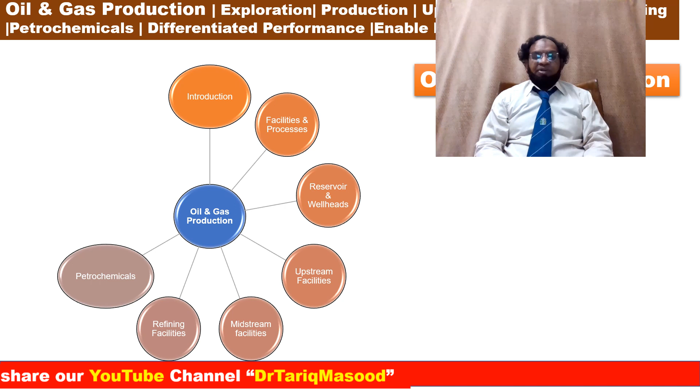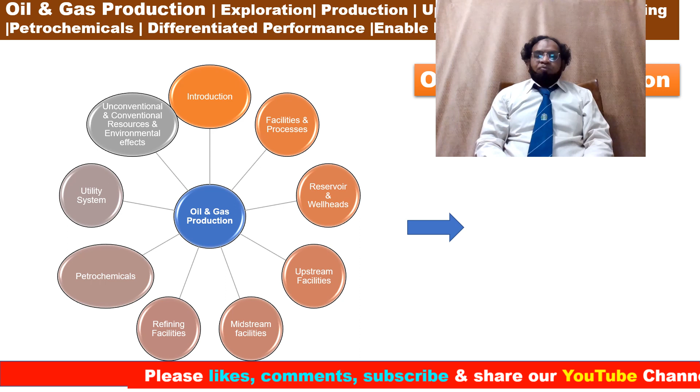Midstream facilities, refining facilities, petrochemical facilities, utility systems, unconventional and conventional resources and environmental effects. What are the ultimate goals? Shaping the clean and sustainable global energy. We have a plan to deliver more than 300 lectures in the next couple of years.

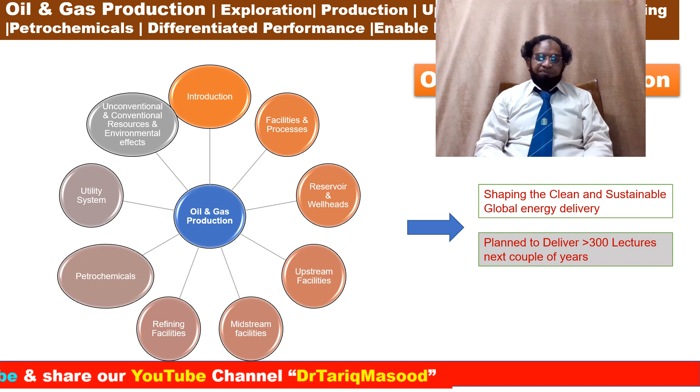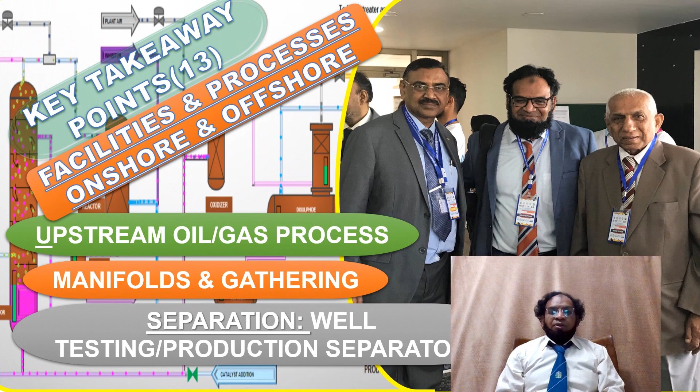Okay, oil and gas production, upstream oil and gas process, lecture number 13. From my next page, I'm going to give you key takeaway points and then I will run a complete trail on my today's lecture. Okay, key takeaway points, lecture number 13: facilities, process, onshore, offshore facilities, upstream oil and gas process, manifolds and gathering, separations, well testing and production separators.

Okay, upstream oil and gas process. The oil and gas process is the process equipment that takes the product from the wellhead manifolds and delivers stabilized marketable product in the form of crude oil, condensate or gas. Components of the process also exist to test products and clean waste products such as produced water.

If you can see in the pictures, I have demonstrated two versions. One is offshore well producers and one is onshore. Okay, this is a medium-sized platform with one production train and it's producing approximately 40 to 45,000 barrels of oil actual production after the separation of the water and gas. The associated gas and water are used for onboard power generation and gas is re-injected back into the reservoir as we have discussed in my earlier slide.

There is only one separation and gas compression train. The water is treated and released. It could also have been re-injected back into the reservoir. This process is quite representative of hundreds of similar size installations and only one more complete gas treatment train for gas export is missing from the system.

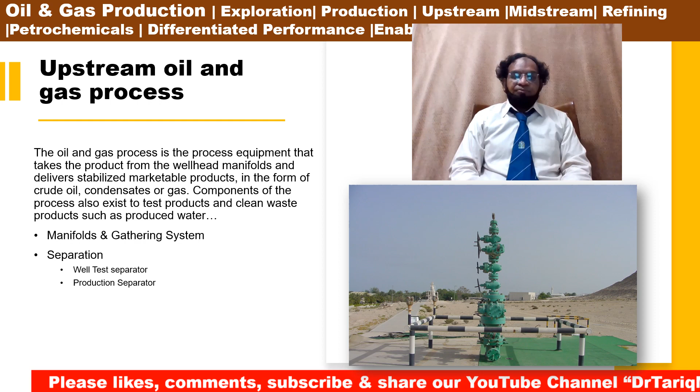Okay, now we will discuss well test separators and production separators. This is the production wells, manifolds. First stage 170, 40, 10 psi, 0 psi, and gas gathering compressor station. This is my dehydration unit, and this is midstream to recover C3, C4 facilities.

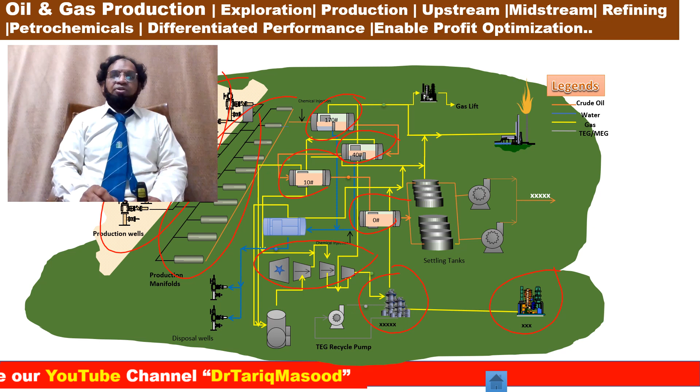Crude oil flows are gathered from different manifolds. Then it's routed to the first stage three-phase production separators. Isolation valve arrangements are provided in the shutdown valve manifold area to ensure a uniform distribution from the different manifolds to the first stage separators. Okay, after implementing a gas lift system, the wellhead pressure dropped from 700 psi to 170 psi.

Demulsifier chemical is injected into each crude oil inlet into the first separators for proper oil and water separation. It helps to separate the water. After separation, gas is compressed and then directed to the dehydration unit. After stabilization, the degassed oil passes under level control into the oil transfer lines to storage facilities at site before being exported into the export area.

Produced water passes through the hydrocyclone where entrained oil is removed. The de-oiled water passes under level control to the degassers, where further traces of oil and gas are removed. The clean water leaves the degasser under level control and passes outside the station perimeter fence to the disposal well.

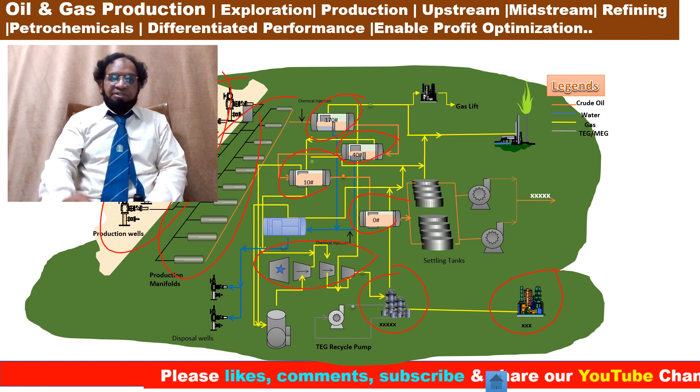This one may include several check valves. The choke, master and wing valves are relatively slow. Therefore, in case of production shutdown, the pressure on the first section before the valves close will rise to the maximum wellhead pressure before these valves can close. The pipeline and risers are designed with this in mind.

Short pipeline distances are not a problem, but longer distances may cause a multi-phase well flow to separate and form several plugs of liquid with gas in between. Traveling in a pipeline, severe slugging may upset the separation process and cause overpressure safety shutdown. Slugging may also occur in the well, as described earlier. Slugging can be controlled manually by adjusting the choke or by automatic slug control valves.

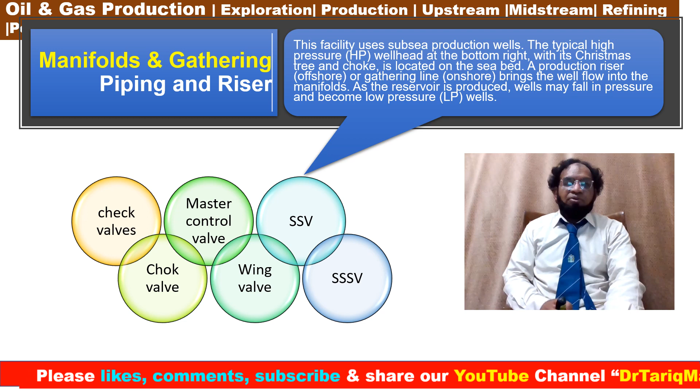The chokes are set to reduce the wellhead flow and pressure to the desired HP and LP pressures respectively. The desired setting for each well, and which wells produce at HP or LP, are defined by reservoir specialists to ensure optimum production and recovery rate.

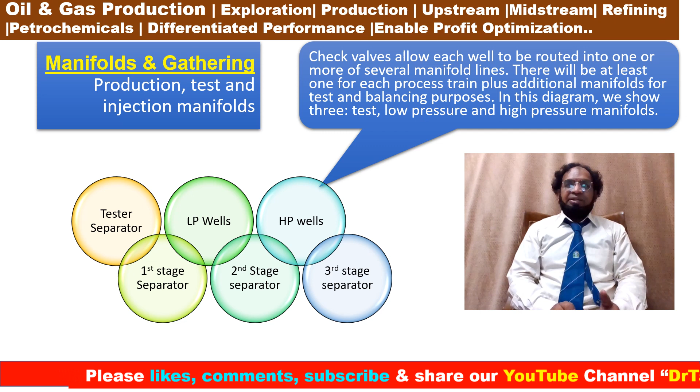Okay, on my next slide, we will give a brief about separation, test separators and well test. Separation: as described earlier in my module, the well stream may consist of crude oil, gas, condensate, water, and various contaminants. The purpose of the separator is to split the flow into desired fractions.

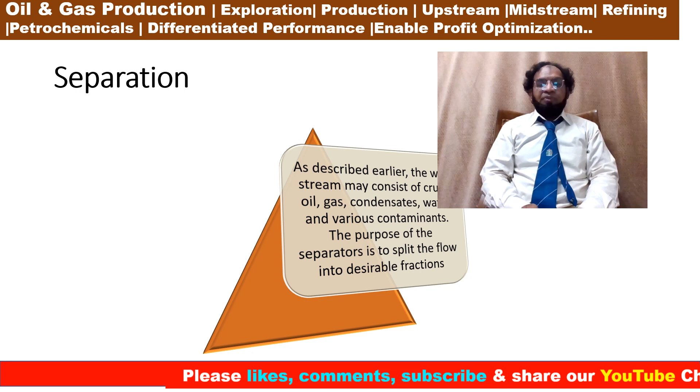Test separators are used to separate the well flow from one or more wells for analysis and detailed flow measurements. In this way, the behavior of each well under different pressure flow conditions can be defined. This normally takes place when the well is taken into production and later at regular intervals, typically 1 to 2 months, and will measure the total and component flow rates under different production conditions.

Undesired consequences such as slugging or sand can also be determined. The separated components are analyzed in the laboratory to determine the hydrocarbon composition of the gas, oil, and condensate. Test separators can also be used to produce fuel gas for power generation when the main process is not running. Alternatively, a three-phase flow meter can be used to save weight.

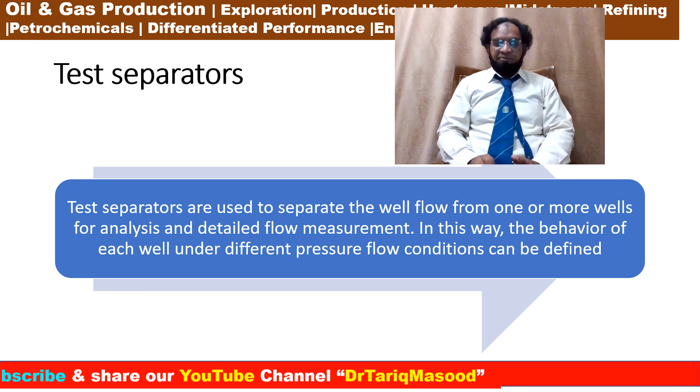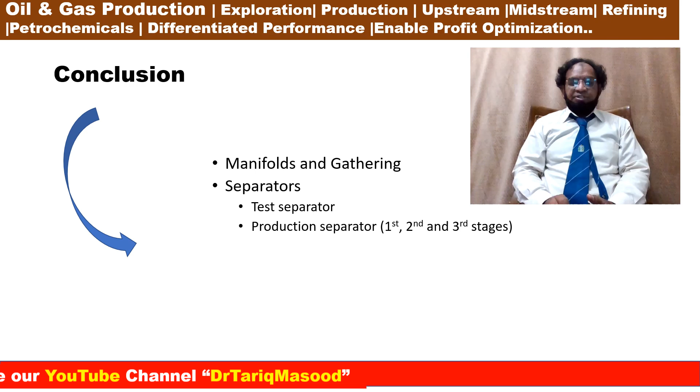Thank you very much. This was my last slide. So we will conclude today's lecture and give you what we plan to discuss in the next couple of weeks. Today we have discussed manifolds and gathering systems, separators, test separators, production separators first, second and third stage. Our future plan is to discuss coalescers, gas treatment, produced water treatment, and electrostatic desalters.